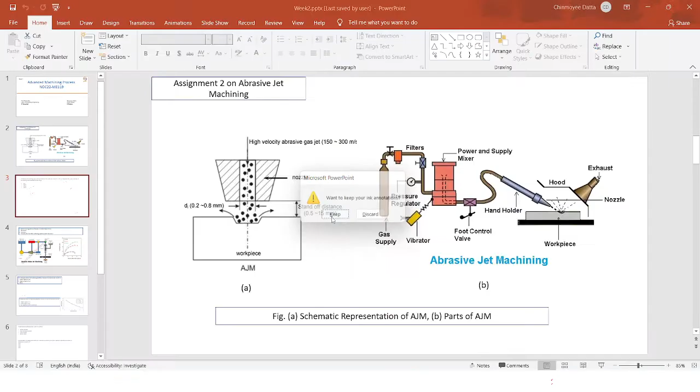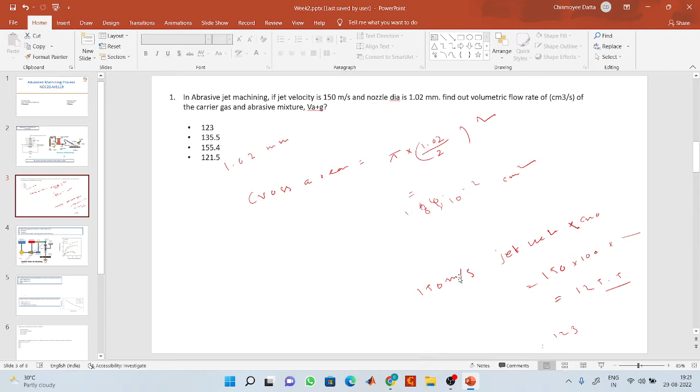So everyone has solved this question, right? It's very simple: first you find the cross sectional area using pi d by 2 whole square, converting the unit into centimeter square. Then the jet velocity, already given as 150 meter per second, you convert into centimeter per second. Multiply cross sectional area by jet velocity to get the volumetric rate of the carrier gas and abrasive mixture.

Shall we move to another part? The second question is: with increasing abrasive flow rate in AWJM, depth of cut... Let me give a brief introduction on abrasive water jet machining. You can see in the figure, the parts of abrasive water jet machining are the reservoir, pump, and intensifier.

Someone wants to join actually. Just a minute, sorry.

In abrasive water jet machining, we've seen the parts as reservoir, pump, intensifier, accumulator, controls, hydraulic unit, valve, abrasive tank, abrasive jet, water jet, and drain and catcher. Every part has some working principle in the whole machining process.

The reservoir acts as the basic part for storing water, which is sent to all other parts of the system when required. In the reservoir water tank, water is stored, which then comes to the hydraulic pump. The hydraulic pump acts as a mediator between the reservoir and the intensifier, sucking water from the reservoir and sending it to the intensifier.

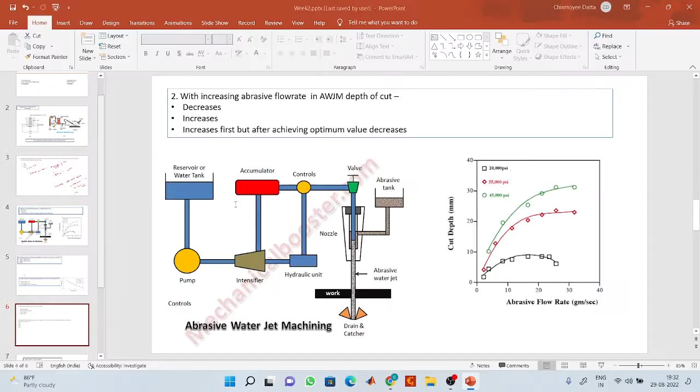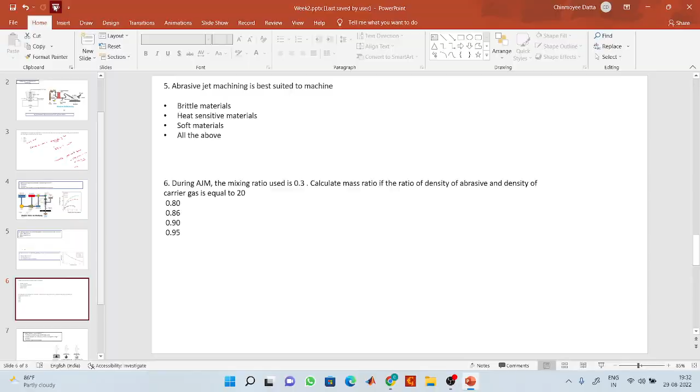So here is that numerical. In that, the mixing ratio is given as 0.3, right? So what is mixing ratio?

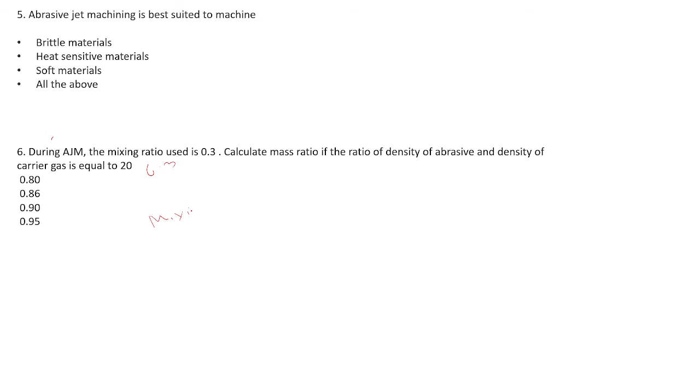Mixing ratio equals volumetric flow rate of abrasive particle divided by volumetric flow rate of carrier gas. Okay. So and that, what is given as mass ratio.

So mass ratio also, let's say alpha equals abrasive mass flow rate by combined mass flow rate of abrasive and carrier gas.

So mixing ratio is the ratio of volumetric flow rate of abrasive divided by volumetric flow rate of carrier gas, and mass ratio is the ratio of abrasive mass flow rate to the combined mass flow rate of abrasive and carrier gas. Okay, so from this, mixing ratio we can define as MR.

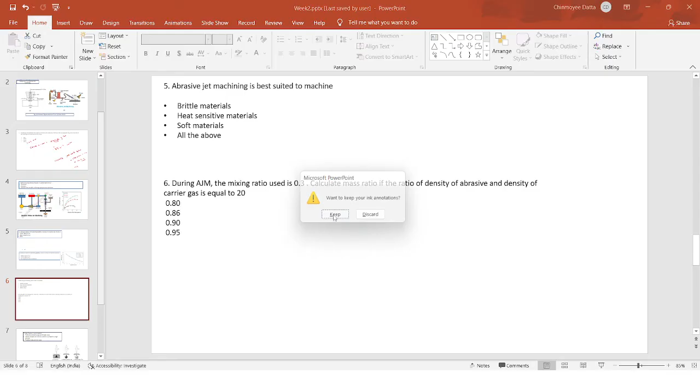So mixing ratio MR we can also write as VA by VG, the volumetric flow rate of abrasive divided by volumetric flow rate of carrier gas.

And alpha we can write as MA by MA plus G, because abrasive mass flow rate divided by combined, so MA plus G I am denoting. So 1 by alpha we can write as...

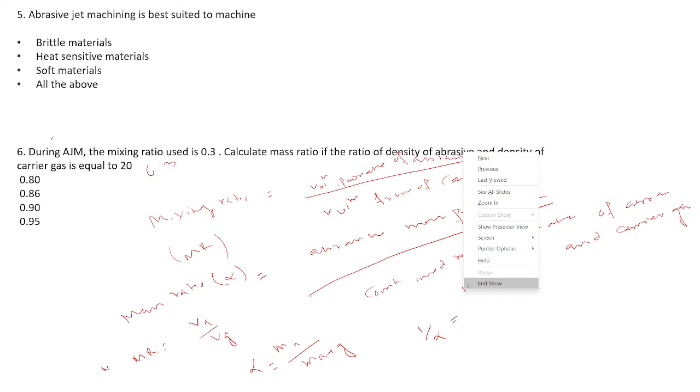1 by alpha we can write here. 1 by alpha equals to rho A VA plus rho G VG, divided by rho A VA.

So actually, basically alpha equals MA, meaning rho A into VA divided by rho A into VA plus rho G into VG.

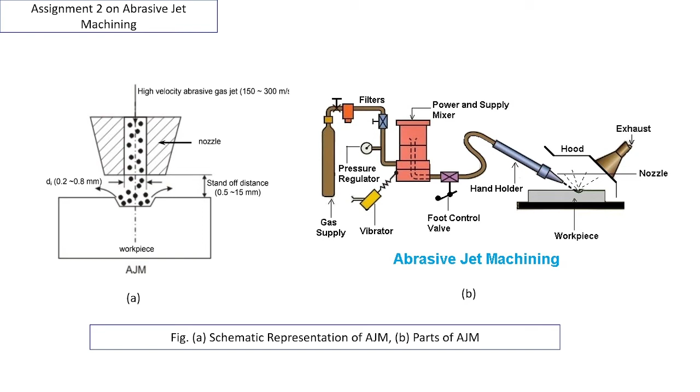Can someone please mute your mic actually? Please mute your mic. SS Kumar, it's your mic only. Please mute your mic actually. SS Kumar, for you only telling.

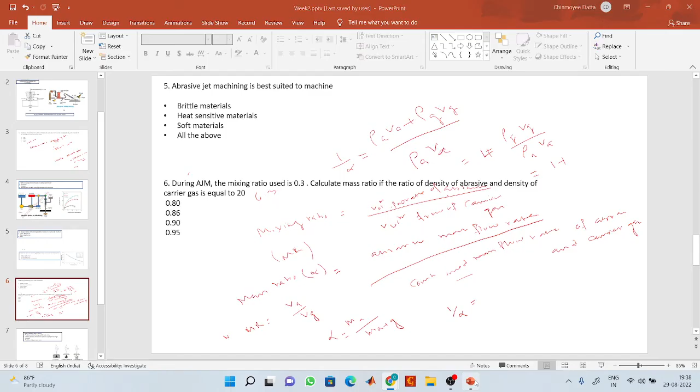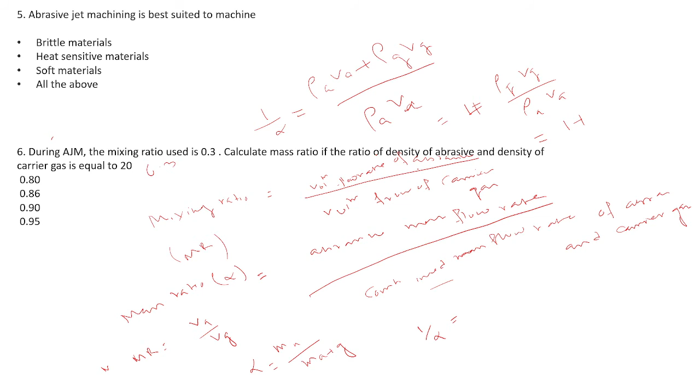So anyway, we are getting 1 plus rho G VG by rho A VA. So we can write rho G VG by rho A VA as rho G by rho A into VG by VA. So then we'll get 1 plus rho G by rho A into VG by VA, which is given as the density mass ratio.

If the ratio of density of abrasive and density of carrier gas is given as 20, that is rho A and rho G, so rho A by rho G is given as 20, meaning rho G by rho A will be 1 by 20.

Into VG by VA. In VG by VA also the mixing ratio is given. So what is the mixing ratio? That is volumetric flow rate of abrasive divided by volumetric flow rate of carrier gas, which is given as VA by VG equals 0.3.

So VG by VA will be 1 by 0.3. So if we solve this, we will get 1 by alpha. You just solve and tell me: 1 plus 1 by 20 into 1 by 0.3. How much do we get? We'll get 7 by 6, I guess.

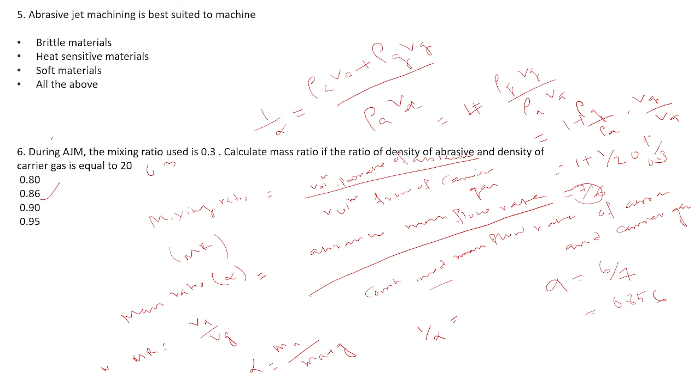So going to the next question.

See, maybe you can get some questions such as: catcher is used in AWJM, AJM, or USM, in which process? So, where are we using a catcher? Only in abrasive water jet machining are we using a catcher. So, why is it used? We have seen in the abrasive water jet machining part also how the catcher is working.

Once the abrasive jet has been used for machining, there may be a sufficiently high level of energy, depending on the type of application. Such a high energy abrasive water jet needs to be contained before it damages any part. That's the reason the catcher is used: to absorb the residual energy of the AWJ, that is the abrasive water jet machining process, and dissipate that same residual energy. So the right answer will be to absorb the residual energy and dissipate the same. Okay.

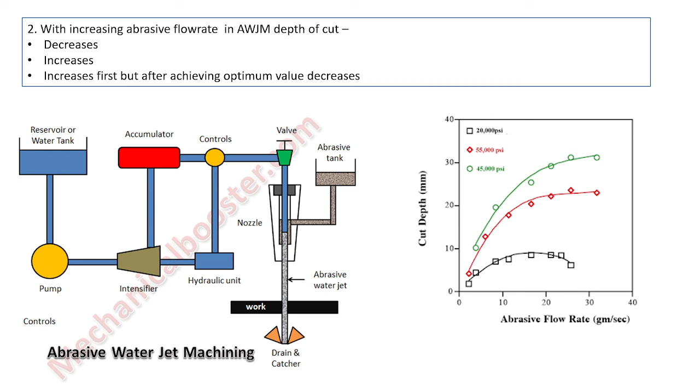Because we have seen in those parts also, where drain and catcher are given. What it does is avoid damage to any part of the machine. It absorbs the residual energy of the abrasive water jet and then dissipates the same residual energy. Actually there are different types of catchers used: water basin type, submerged steel balls, and TiB2 plate type. You can see the figures also.

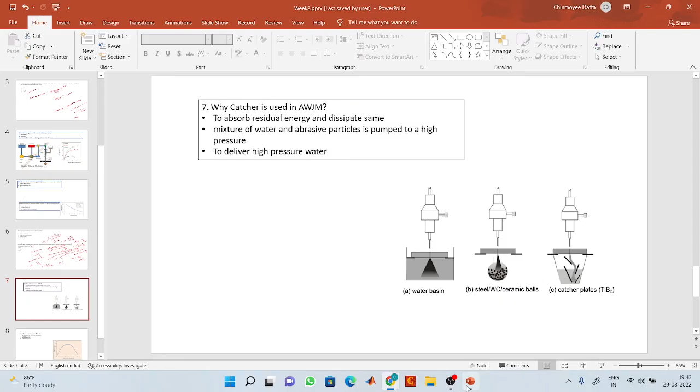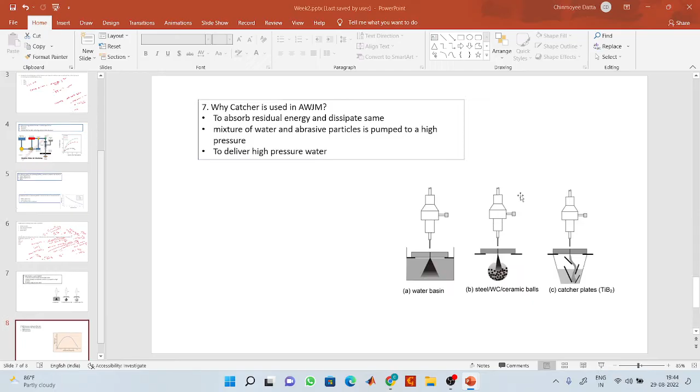But lower abrasive flow rate leads to lower material removal rate, due to the smaller number of cutting edges present in the machining process. After a certain level, abrasive flow velocity starts decreasing due to the increased mass fraction of abrasives, which causes a reduction in MRR, and the jet energy is distributed among more particles. That effect causes the decrease in MRR with increasing abrasive flow rate.

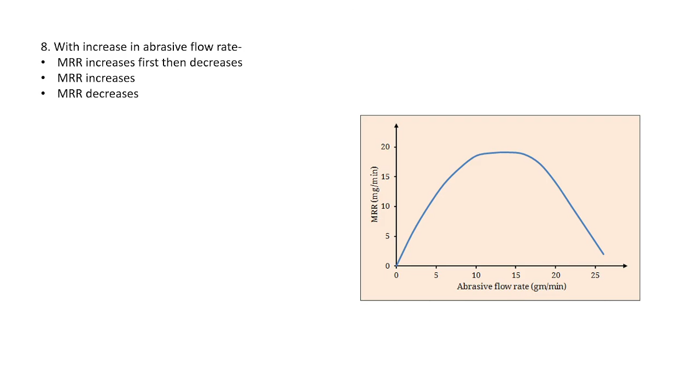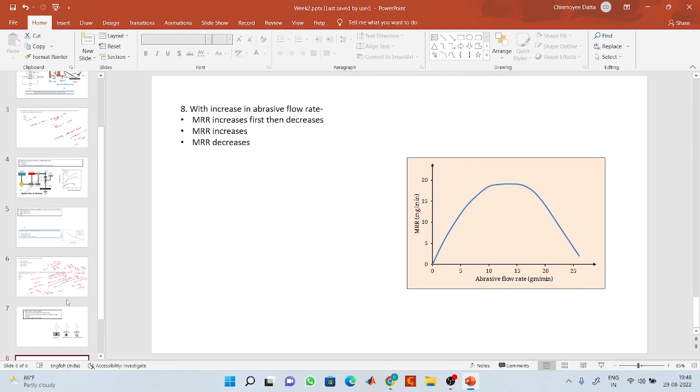So those are a few assignment questions which you can refer to solve this year's assignment questions. Most of the numericals I tried to explain in previous year NPTEL lectures; if you refer to those numerical solutions, you can answer this year's questions also. The basic questions, how process parameters affect MRR and how depth of cut and MRR react with process parameters in AWJM and AJM, I have also discussed. So you can refer to those and solve this year's assignments.